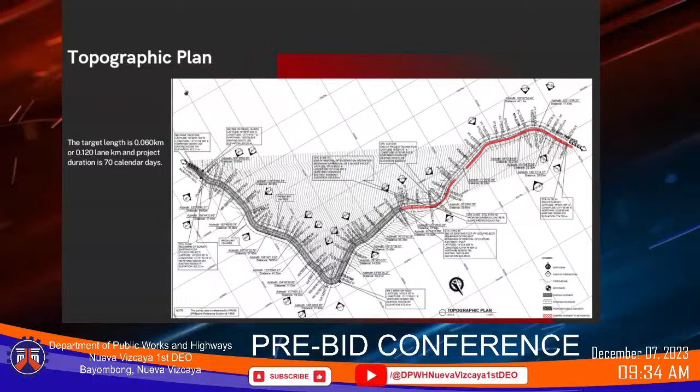So these are the following technical details of the project. The project site is located approximately 2.8 kilometers from Ambaguio Town Hall, and approximately 30 kilometers from Bayombong, Nueva Vizcaya. This is a continuation of the concreting project implemented this year, FY 2023. The yellow alignment shows the FY 2023 project and the red indicates the FY 2024 project. The FY 2024 project has a target length of 0.06 kilometers or 0.12 lane kilometer with a duration of 70 calendar days.

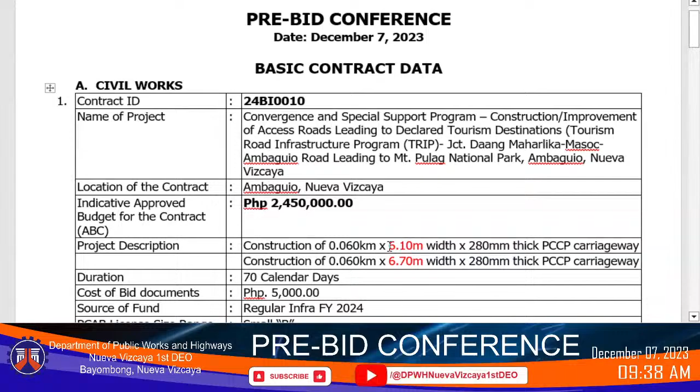If the width will be increased, is there a revision of the quantities? Because the description says 6.10 width, and then we're going to increase it to 6.7. How about the quantities, will this be affected or not? It will not be affected, sir. How not? Because, sir, during the advertisement period, we misstated the width in this description, so the bill of quantities is not affected. So you mean to say that there is a typo error in the encoding of the width of the PCCP, particularly in the project description? Yes, sir. Okay, noted.

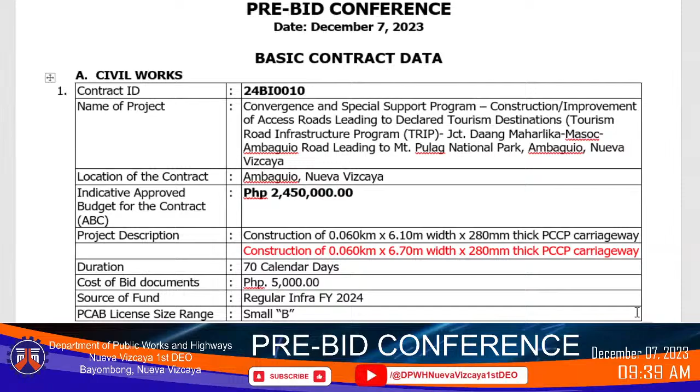No changes in the... wait, but you should first... please take note, how about the provisional member for all types of procurement?

I have no amendments, sir. No amendments? Okay, noted. How about the regular member? Okay, Secretariat, please take note that the only amendment is the increase in the width of the PCCP. And the quantities will not be affected since it is just a typo error in the project description.

Thank you, this is noted, sir. Okay, for the second project, it has contract ID number 24BI11, and this will be discussed by Engineer Angie Argel Reyes.

Good morning, everyone. Allow me to read the basic contract data for this particular project. Contract ID 24BI0011, name of project: Convergence and Special Support Program, construction improvement of access roads leading to declared tourism destinations, Tourism Road Infrastructure Program (TRIP), access road leading to Lower Magat Ecotourism Park, Diadi, Nueva Vizcaya. Location of the contract: Diadi, Nueva Vizcaya. Indicative approved budget for the contract: 2,450,000. Project description: construction of 0.125 kilometer by 6.1 meter width by 280 mm thick PCCP carriageway.

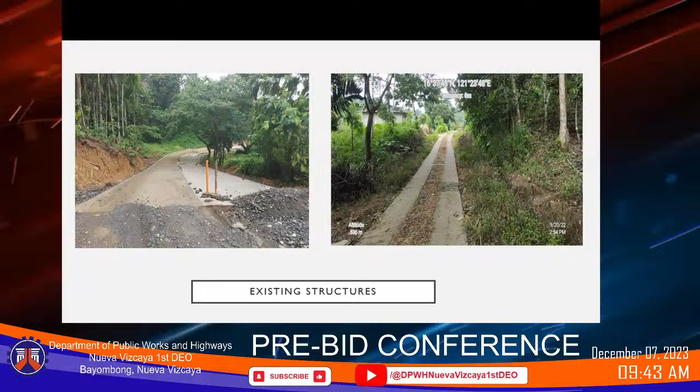So this is the existing pavement which was previously constructed, and this existing tire path is to be removed. The total length of the project is 125 meters with a width of 6.10 meters and a thickness of 280 mm. The proposed project also has a concrete curb and gutter, cast in place, since the terrain of the project is mountainous. From Station 0+760 to Station 0+845, left side, metal guardrails will be provided.

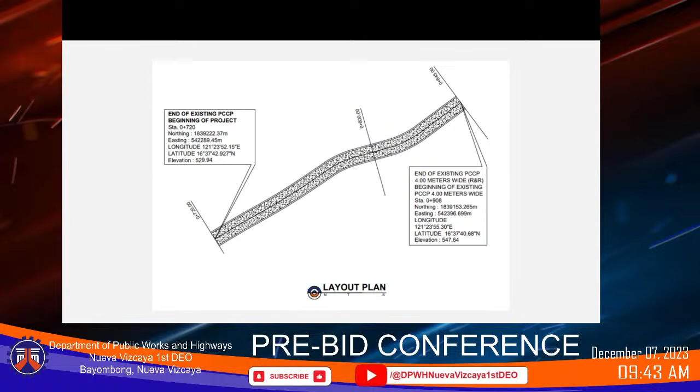The source of aggregate for both Item 311 and Item 200 is at Baretbet Quarry, approximately 28.3 kilometers from the project site. The source of materials, cement and RSB, will be in Solano, approximately 41.8 kilometers from the project site. This project will be completed within 70 calendar days, inclusive of predetermined Sundays and holidays.

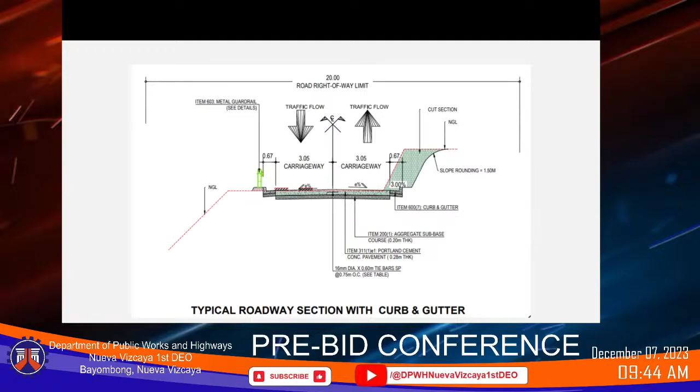Before we go to further discussion of contract ID number 11, may I request Engineer Mirtel Digamo for project number 10? Do we also have curb and gutter there along Mount Pulag Road? Yes, sir, we have. What type of curb and gutter? Cast in place, sir. Cast in place? Yes po, for the reason that the road is mountainous, winding, and in a mountainous area wherein precast is not advisable. Okay? Yes.

Okay, may I request the Secretariat if there is any comments, recommendations, or query about project number 11? No comments? Okay. Then may I request the members of the BAC if there is any amendment? I would like to start from Engineer Chairman Buenavista. Mr. Presiding Officer, I have no amendments.

How about the provisional member for all types of procurement? I have no amendment, sir. Noted. How about the regular member of the BAC, Madam Veronica Leodovico? I have no amendment, Mr. Vice Chair. No amendments. Since there is no amendment for this particular project, the advertised bidding documents from PhilGEPS and the DPWH website will now be sustained as is. Thank you.

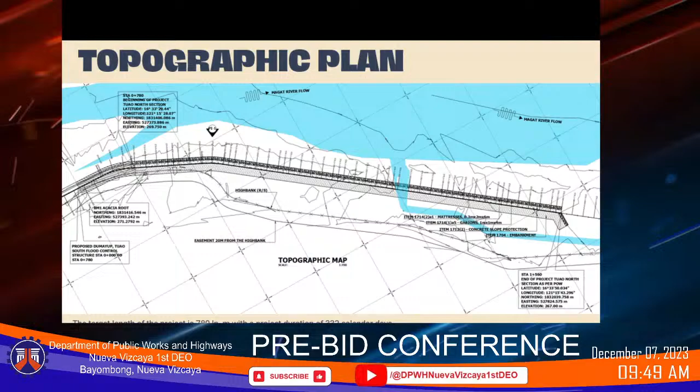The structure is composed of concrete slope protection with a thickness of 0.20 meter and a total height of 5 meters. Reinforcing steel bars for the concrete slope protection are 12 millimeter diameter, spaced at 400 millimeter on center both ways. Next slide, po.

Next slide. The concrete slope protection was provided with a parapet with a dimension of 0.25 meters by 0.50 meters, reinforced with 12 millimeter diameter vertical bars spaced at 400 millimeter, and two 12 millimeter diameter horizontal bars spaced at 400 millimeter. The concrete slope protection is also provided with a walkway with a width of 1 meter. Next slide, po. Go back to the slide, you're going too fast, you didn't even explain the previous slide. Go back there. There.

The structure is composed of concrete slope protection with a thickness of 0.20 meter and a total height of 5 meters. The reinforcing steel bars for the concrete slope protection are 12 millimeter diameter, spaced at 400 millimeter on center both ways.

From your typical section, you have gabions and mattresses. Mattresses and gabions will be placed in front of the sheet piles from station 0+780 to station 1+560.

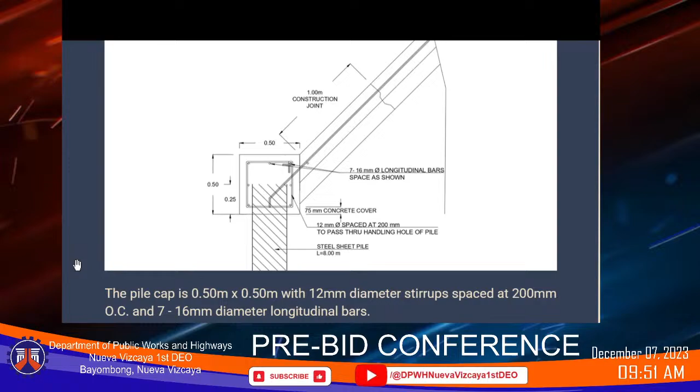Okay, please show the typical section of the sheet piles. The one near the sheet pile. The one up top. The same, yes, that one, on the right.

The sheet pile is 8 meter length, Z-type steel sheet piles, with a nominal width of 770 millimeter, a nominal height of 343.50 millimeter, flange thickness of 8.6 millimeter, and web thickness of 8.5 millimeters.

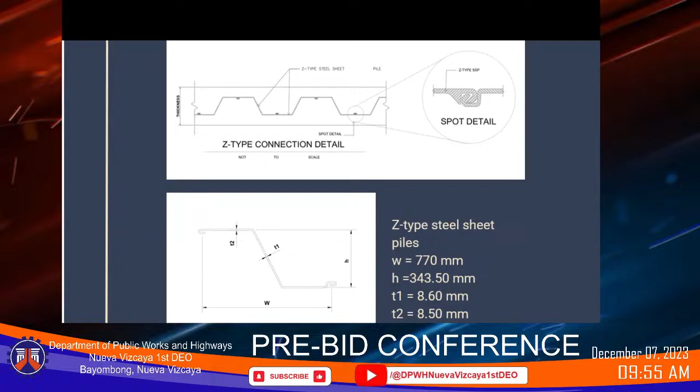For the cut-off walls, they are placed every 50 meters within the length of the concrete slope protection, with 16 millimeter diameter vertical bars spaced at 400 millimeter on center and 12 millimeter diameter horizontal bars spaced at 400 millimeter on center. The footing of the cut-off wall is 0.30 meters thick with 16 millimeter diameter top and bottom bars spaced at 400 millimeter both ways.

The aggregates for the project will be transported from the Baretbet section of Magat River in Bagabag, Nueva Vizcaya, situated approximately 6 kilometers away from the project site. That is all.

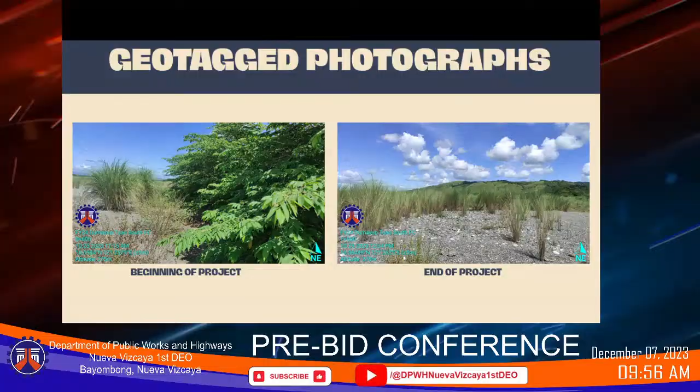Okay, thank you, Engineer Jeremy Soriano. From the Secretariat, do we have any query or comments from our prospective bidders? There is none. So I would like again to ask the members of the BAC, particularly Engineer Jermin Buenavista, the provisional member from the Planning and Design section.

Mr. Presiding Officer, I have no amendments regarding this project. Noted. How about Architect IB Olivar Salazar? I have no amendments, sir.

Noted. How about the regular member, Madam Veronica Jodevico? No amendment, Mr. Vice Chair. Noted. Secretariat, please take note that since we have no amendments for this particular project, we are going to sustain the advertised bidding documents from the PhilGEPS and DPWH website. Noted, sir.

So we go now to contract ID number 13, and this will be presented to us by Engineer Philip Pagarigan. Philip, please take it away. Thank you, po. I will present the basic contract data for contract ID.

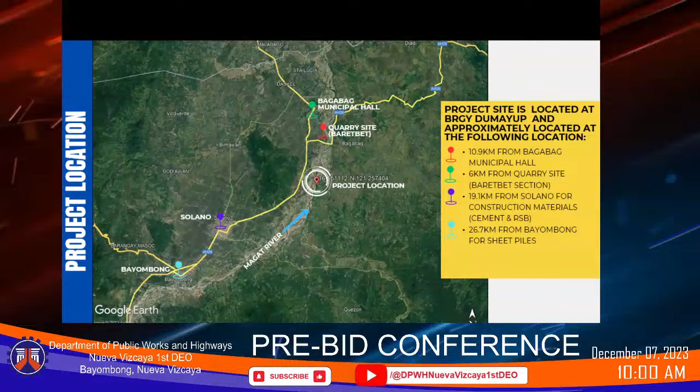For the next slide, our detailed cross-section. The structure will be composed of concrete slope protection, 200 mm thick, with a height of 5 meters from the pile cap. Reinforcement is 12 mm bars spaced at 400 both ways. It has gabion of 1 by 1 by 4, and mattresses 0.3 thick by 2 meters by 6. We start from station 00 to station 780.

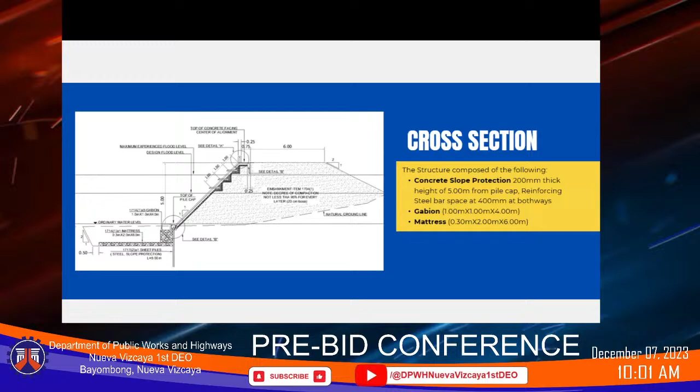Next slide, this is the detail for the pile cap, 500 by 500 with 12 mm diameter stirrups spaced at 200 on center and 7 pieces of 16 mm diameter longitudinal bars.

From the top, this is the detail of the parapet. We will provide a parapet from station 00 to 780 with a height of 0.5 meters and a thickness of 0.25 meters.

Excuse me, regarding the depth anchor of the cut-off wall. The hook is for the cut-off wall, 1 meter is the depth. The thickness is 0.2 for ours.

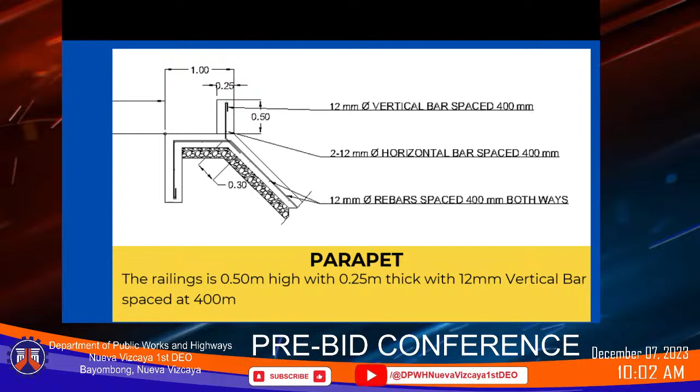The detail of our sheet pile is for Z-type steel sheet piles. Width is 770 millimeters with a height, and the H is 343.50. Thickness is 8.60 millimeters, and the other thickness is 8.5 millimeters. Same as in our previous project, sir. The thickness of the sheet pile is 8.6, and then 8.5 millimeters, yes, same as the previous project.

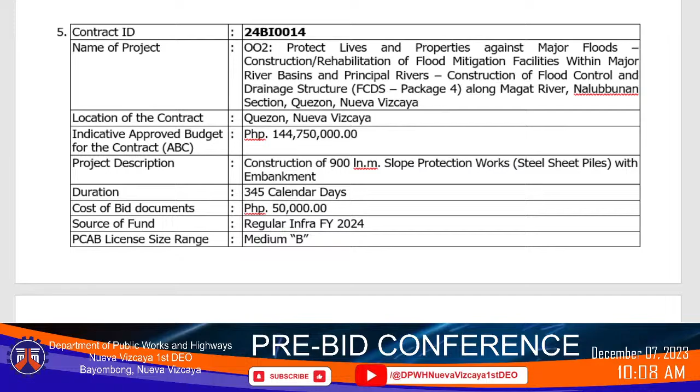The source of fund is Regular Infra for the year 2024. The PCAB license size range is Medium B. PowerPoint presentation, please.

For the 24BI0014, it is located at Nalubbunan. It is just downstream of Madjangat Bridge, continuation of the existing rubble concrete.

Next slide, please. This is the layout plan of this proposed project. Next slide, please.

For this particular project, sir, for the steel sheet pile, the length is 9 meters with a width of 0.77 meters and 0.3435 meters, with a pile cap of 0.5 by 0.5 meters, and the thickness of the steel sheet piles is 8 to 9 mm thick. Hot rolled Z-type sheet pile.

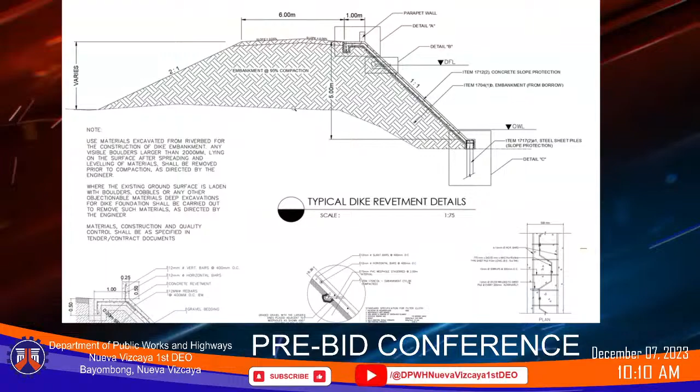Paki-con mo nga yung parapet, yung nasa baba. Paki-enlarge mo nga, Donna. And then paki-discuss, Joseph, about the walkway and the cut-off wall.

For this particular project, the walkway has a total width of 1 meter with a parapet thickness of 0.25 and a height of 0.5 meters. Then at the hook, the cut-off wall anchor has a depth of only 0.5 meters and a thickness of 0.3. That's also the thickness of the concrete slope protection works, which is 0.3.

Do we have any comments or query from our prospective bidders, Secretariat? There is none. Do you have any amendments for this particular project, Engineer Jermin Buenavista? I have no amendments, Mr. Chair.

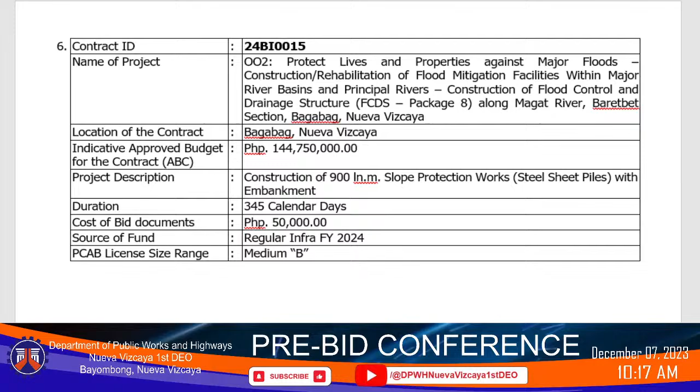Next slide, please. The location of the project is the continuation of the previous project that was pre-bid last time. It is located downstream from San Lorenzo Bridge, facing the left side.

Next slide, please. This is the layout plan of the proposed project. This is the typical section of the proposed project. The steel sheet pile has a height or length of 9 meters, with a 0.5 by 0.5 dimension pile cap. It has a height of 5 meters with a slope of 1:1. The top part of the slope protection has a width of 1 meter. The parapet has a thickness of 0.25 and a height of 0.5. The embankment is 7 meters wide, and the slope at the back is 1:2.

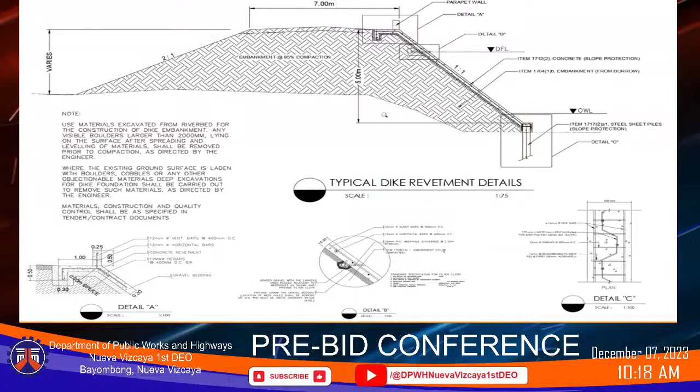I think that's all, sir, for this contract ID number 24BI0015. Thank you, Engineer Joseph Sanchez Adukul.

Do we have any query comments from our prospective bidders, Madam Donna? There is none? Okay.

Do we have any amendments from our bidding documents? Can we start from Architect IB Olivar Salazar, the provisional member for all types of procurement? I have no amendments, sir. How about Engineer Jermin Buenavista, the provisional member, planning and design end user? Do you have any amendments for that particular project? I have no amendments, sir. How about our regular member, Madam Veronica Lodovico? I have no amendments, Mr. Vice Chair. Secretariat, please take note that there will be no amendments for this particular project.

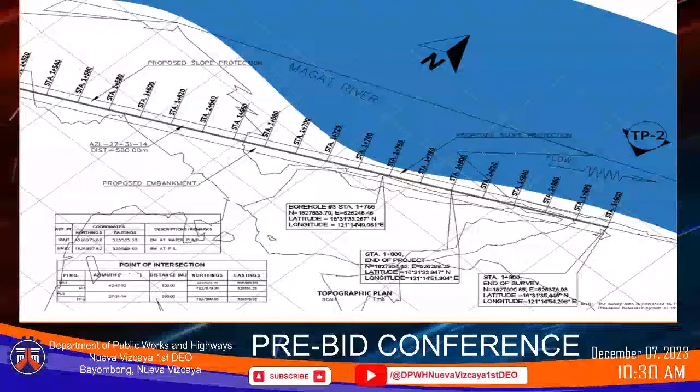For the detail of this proposed project, the height or length of the steel sheet piles for this project, sir, is 8 meters. Then at the top of the steel sheet pile, it has a pile cap of 500mm by 500mm, with a slope protection of a height of 5 meters with a slope of 1:1. Then at the top part of the slope protection that would serve as a walkway, it has a total width of 1 meter with a parapet of 0.25 width and height of 0.5. Then for the embankment, it has a 6 meters width, and at the back it has a slope of 1:2. I think that's all for this particular project.

Okay, thank you Engineer Adukol. From the Secretariat, may we know if there are any comments from the YouTube Live? If there are none, may we also know if there are amendments from our fellow BAC members, from the provisional member from the Planning and Design section, Engineer Buenavista.

The slide shows a close satellite view of the project. If you are facing downstream, it would be 250 meters away from Lamut Bridge. As the legend shows, the proposed alignment is labeled by a red line, and the existing revetments are labeled by a yellow line.

Next page, please. The slide shows the layout plan of the project, showing the total length of 720 linear meters constructed between or at the gap of two existing revetments.

Next slide, please. The left picture of the slide shows us the existing concrete revetment at upstream, and at the right side is the picture of the existing concrete revetment at downstream, or at station 650 to station 720, which is at the end side of our project.

Do you have a picture presentation for that particular section, Marson? Yes sir, meron po akong dinesign. No, yung topo plan sana, para makita ng ating viewers. Yes sir. Next slide po, papakita. Yan po sir, this is the topographic plan. Hindi, kung sa picture mo sana sa downstream at Ifugao side, mayroon silang slope protection works doon eh. Yun na lang po kasi yung provided na picture sir eh. Okay, yes sir.

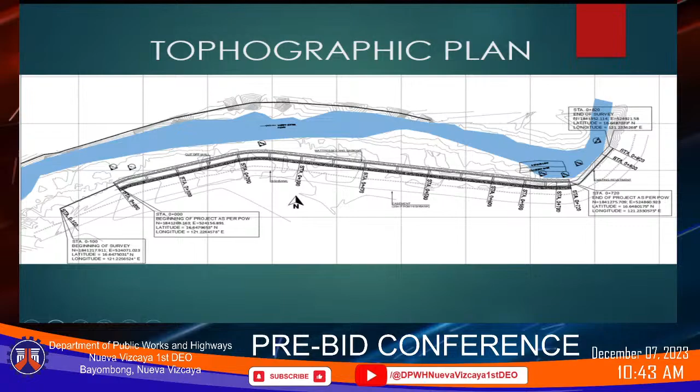Next slide. The slide shows us the typical section of the concrete slope at station 0 to station 650. The reinforcement of the pile is 60 by 60 and has a stirrup of 12 mm, and the main bar would be 16 mm. It would be discussed on the next page because we have a more typical, or larger, section there.

And the steel sheet pile to be used is a Z type and has a length of 7 meters. The total height of the concrete slope protection is 6 meters with a berm at 3 meters, and the slope of 1 by 1, or 1 vertical and 1 horizontal, with a concrete parapet which has a dimension of 0.25 by 0.50 and an embankment of 5 meters. Next slide, please.

The slide shows a typical section of the cut-off wall. The cut-off wall reinforcement from station 0 to station 650 has horizontal bars of 16 mm spaced at 400, and also horizontal 12 mm diameter bars spaced at 400. The thickness is 0.30.

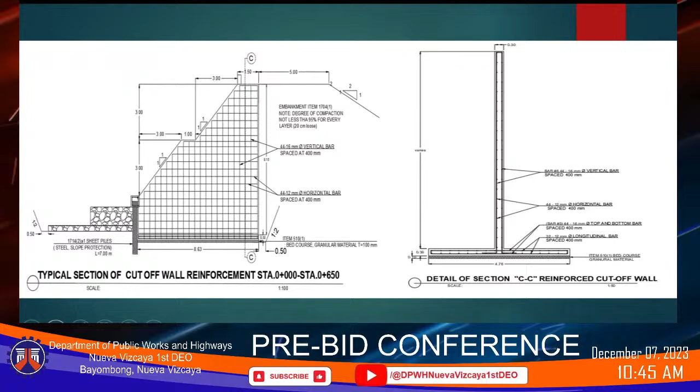Next slide, please. This section shows the part at the end, at station 650 to 720, because it has an existing revetment. We came up with the design to tie in the slope protection in order to maximize our design. Next slide, please.

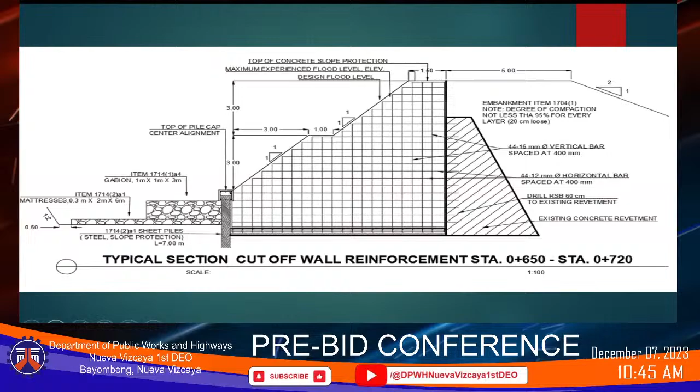And this is the typical section for the cut-off wall, connecting to the existing structure. Next slide.

That's all, Marston? Yes, sir. That's all. So, someone asked me a query - did you explain the separator or cut-off wall? Cut-off wall, sir, is located every 50 meters of the project. Yes, sir. That is not exactly a cut-off wall, but if you think about it, it is a concrete retaining wall, right, Jermaine? Yes, sir. So you're going to construct the retaining wall prior to the construction of the slope protection works, right? Yes, sir. Because that needs to be done before you do the embankment. Yes, sir, because that will become the pattern, the guide for the slope of the slope protection works. Yes, sir. Okay.

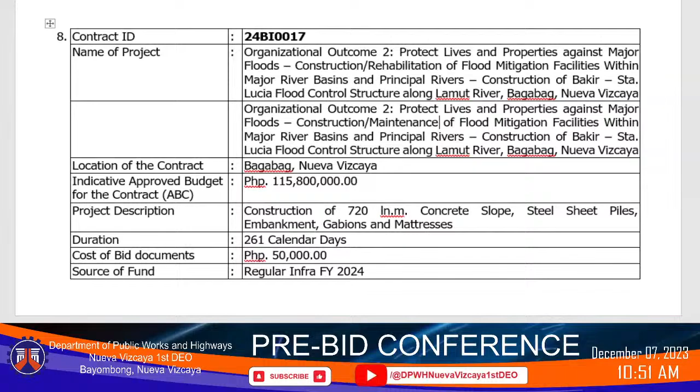And then another amendment, sir, is the calendar days from 261 calendar days to 328 calendar days, sir. Okay, please take note, Secretariat.

Any more amendments for contract ID number 24BI0017? No more, sir. Okay, noted. How about Architect Ivy Olivar Salazar?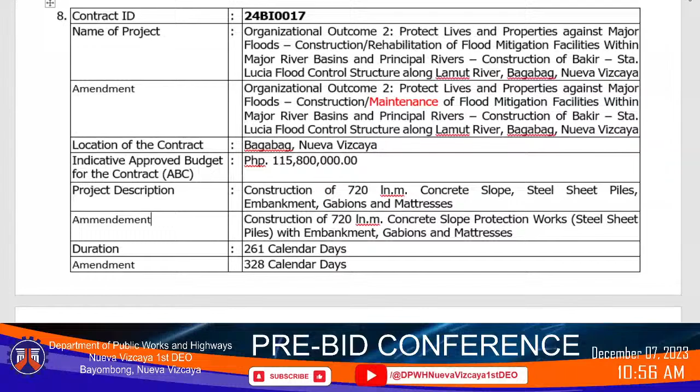Instead of construction/rehabilitation, it will be construction/maintenance of flood mitigation facilities. And for the project duration, from 261 calendar days to 328 calendar days. Please take note, on the preparation of the BAC resolution for the same category, there will be the same project description, which is concrete slope protection works, open and close parentheses, steel sheet piles with embankment. Please take note, okay? So we go to the last project to be discussed on the basic contract data.

And it has contract ID number 24BI0018. And this will be discussed to us by Engineer Myrtel Briosos Grospe Degamo. Myrtel, please take it away.

Thank you, sir. So for the last contract for today's procurement activity, contract ID 24BI0018. Name of project is Organizational Outcome 2, Protect Lives and Properties Against Major Floods, Construction/Rehabilitation of Flood Mitigation Facilities within Major River Basins and Principal Rivers, Construction of Santa Lucia Bakir River Control Structure along Magat River, Bagabag, Nueva Vizcaya. Location of the project is Bagabag, Nueva Vizcaya. Indicative approved budget for the contract is 115,800,000 pesos. Project description is construction of 720 linear meter concrete slope, steel sheet piles, embankment, gabions, and mattresses. Duration is 261 calendar days. Cost of bid documents is 50,000 pesos. Source of fund is regular infra FY 2024, and PCAB license size range is Medium B.

So for the technical details of the project, the site is located at Barangay Santa Lucia, Bagabag, Nueva Vizcaya. It is approximately 5.5 kilometers from Bagabag Municipal Hall and near the intersection of Lamut River and Magat River.

The slide shows the yellow line is the proposed Santa Lucia flood control and the red line is the project Santa Lucia Bakir flood control.

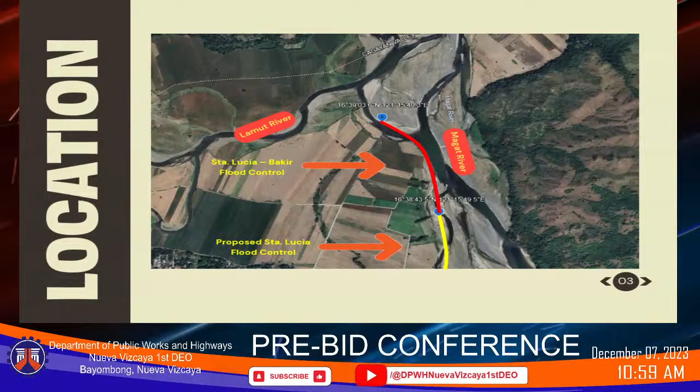Next slide, please. So the target length of the project is 720 linear meters with a project duration of 328 calendar days.

The structure is composed of concrete slope protection with a thickness of 0.2 meters and a total height of 6 meters, with a 1 meter wide berm located at 3 meters from top of pile cap. The top of the slope protection is 1.5 meters with parapet with a dimension of 0.25 meters by 0.5 meters.

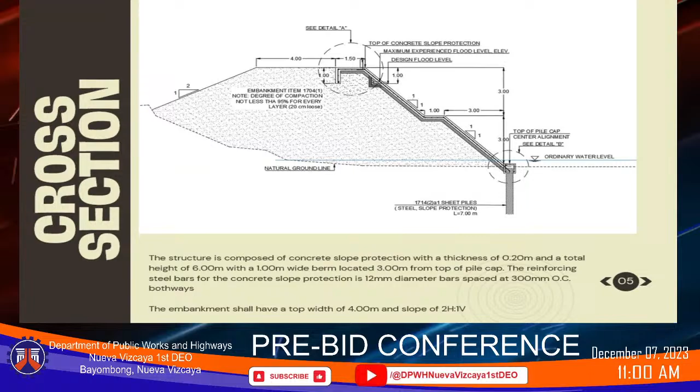The reinforcing steel bars for the concrete slope protection is 12 mm diameter bars spaced at 300 mm both ways. The embankment shall have a top width of 4 meters and a slope of 2 horizontal and 1 vertical.

So 2 by 6 by 0.3 meter mattresses and 1 by 1 by 4 meter gabions will be placed in front of the sheet piles from station 900 to station 1 plus 320.

Next slide. The pile cap is 0.6 meters by 0.6 meters with 12 mm diameter stirrups spaced at 200 mm, and 7 pieces of 16 mm diameter longitudinal bars. 12 mm diameter bars are added as shown for additional reinforcement.

7 meter Z-type steel sheet piles will be used with a nominal width of 770 mm, nominal height of 343.5 mm, flange thickness of 8.6 mm, and web thickness of 8.5 mm.

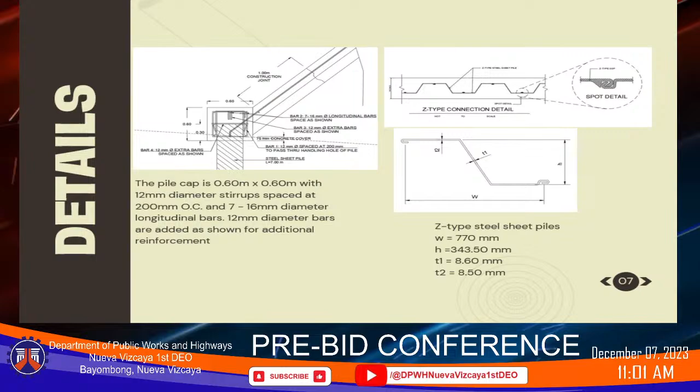Next slide po. So from design guidelines, criteria, and standards for rigid revetments, the length of one segment of revetment along the longitudinal direction should not be more than 50 meters.

Therefore, cut-off walls or retaining walls are placed every 50 meters, with 16 mm diameter vertical bars spaced at 400 mm and 12 mm diameter horizontal bars spaced at 400 mm.

The footing of the cut-off or retaining wall is 0.3 meter thick with 16 mm diameter top and bottom bars spaced at 400 mm both ways.

So the aggregates for the project will be transported from the Santa Lucia Quarry in Bagabag, Nueva Vizcaya, situated approximately 4 kilometers away from the project site.

So that's all, sir, for contract ID number 24BI0018. Thank you, sir.

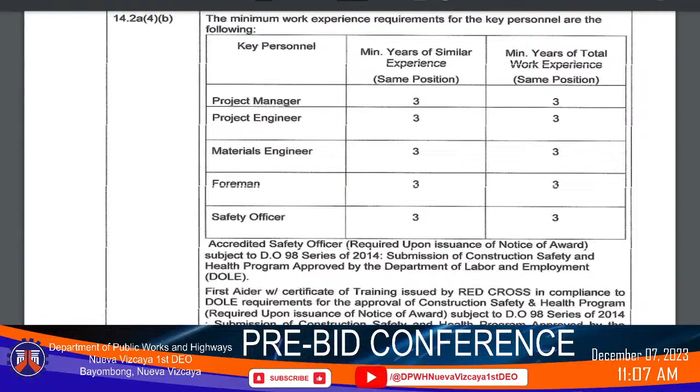For project manager, project engineer, materials engineer, foreman, and safety officer, the minimum years of similar experience with same position is 3 years, and the minimum years of total work experience with same position is 3 years.

The accredited safety officer is required upon issuance of notice of award, subject to DO 98 series of 2014, submission of a construction safety and health program approved by the Department of Labor and Employment. For the first aider, a certificate of training issued by Red Cross is required in compliance with DOLE requirements for the approval of the construction safety and health program, required upon issuance of notice of award subject to DO 98 series of 2014.

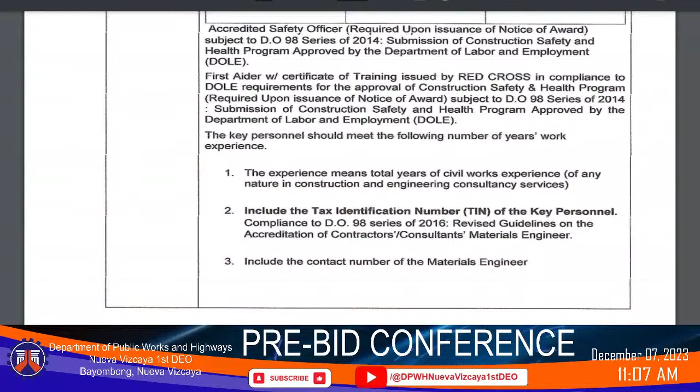For ITB clause 14.2A4, the minimum major equipment requirements are the following: 1 low bed, 1 backhoe with breaker, 1 payloader, 2 dump trucks, 1 bulldozer, 1 backhoe, 1 motorized road grader, 1 vibratory roller, 1 water truck pump, 4 transit mixers, 2 concrete vibrators, 1 concrete batch plant, 1 concrete screeder, 1 concrete saw, 1 bar cutter of 25mm and 1 bar cutter of 32mm, 1 joint sealer, 1 bagger mixer, 1 backhoe wheel mounted, 1 concrete paver, and 1 cargo service truck.

For the laboratory equipment, please refer to DO 11 series of 2017 for the minimum materials testing equipment, and DO 127 series of 2018 for the strict application of RA 9184, the conduct of post-qualification of bidders with delayed ongoing contracts with the DPWH.

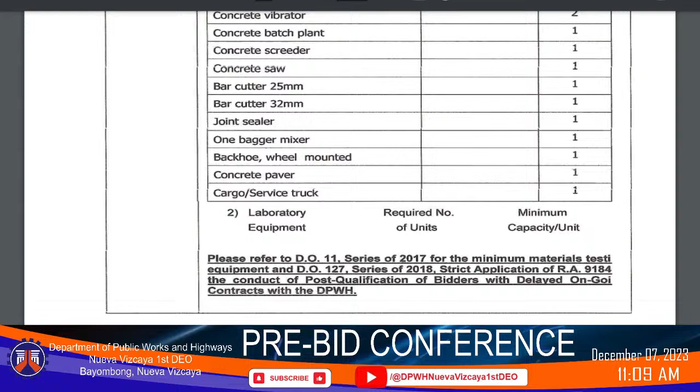For contract ID 24BI0011, for ITB clause 14.2A4B, the minimum work experience requirements for the key personnel are the following: project manager, project engineer, materials engineer, foreman, and safety officer. The minimum years of similar experience with same position is 3 years, and the minimum years of total work experience with same position is 3 years.

For ITB clause 14.2A4, the minimum major equipment requirements are the following: 2 payloaders, 3 dump trucks, 1 water truck pump, 1 cargo service truck, 4 transit mixers, 5 low bed, 1 backhoe with pavement breaker, 1 vibratory roller, 1 bulldozer, 1 concrete paver, and 1 motorized road grader. For the laboratory equipment, please refer to DO 11 series of 2017 for the minimum materials testing equipment.

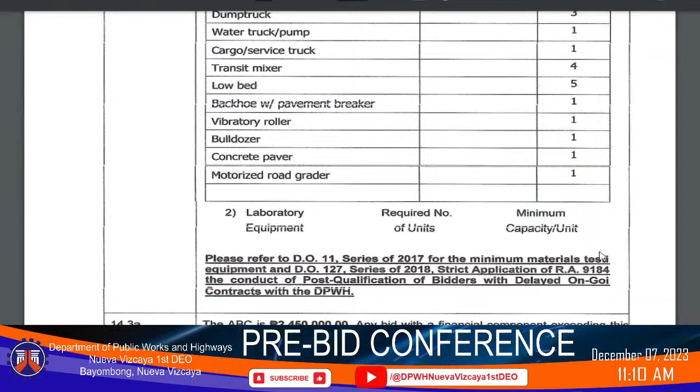For contract ID 24BI0012, for ITB clause 14.2A4B, the minimum work experience requirements for the key personnel are the following: project manager, project engineer, foreman, safety officer. The minimum years of similar experience with same position is 3 years, and the minimum years of total work experience with same position is 3 years.

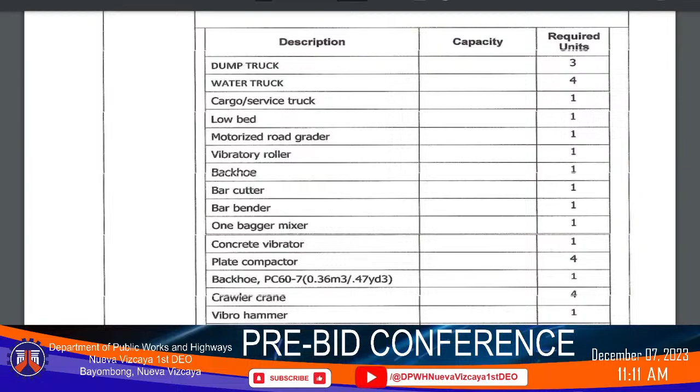For ITB clause 14.2A4, the minimum major equipment requirements are the following: 3 dump trucks, 4 water trucks, 1 cargo service truck, 1 low bed, 1 motorized road grader, 1 vibratory roller, 1 backhoe, 1 bar cutter, 1 bar bender, 1 bagger mixer, 1 concrete vibrator, 4 plate compactors, 1 backhoe, 4 crawler crane, 1 vibro hammer, 1 welding machine, 1 cutting outfit, and 4 water pumps. For the laboratory equipment, please refer to DO 11 series of 2017 for the minimum materials testing equipment.

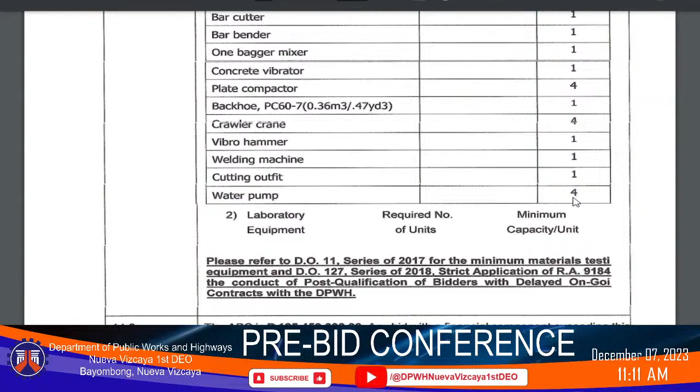For contract ID 24BI0013, for ITB clause 14.2A4B, the minimum work experience requirements for the key personnel are the following: project manager, project engineer, materials engineer, foreman, and safety officer. For the project manager, project engineer, materials engineer, and foreman, the minimum years of similar experience with same position is 5 years, and the minimum years of total work experience with same position is 5 years. For the safety officer, the minimum years of similar experience with same position is 3 years, and the minimum years of total work experience with same position is 3 years.

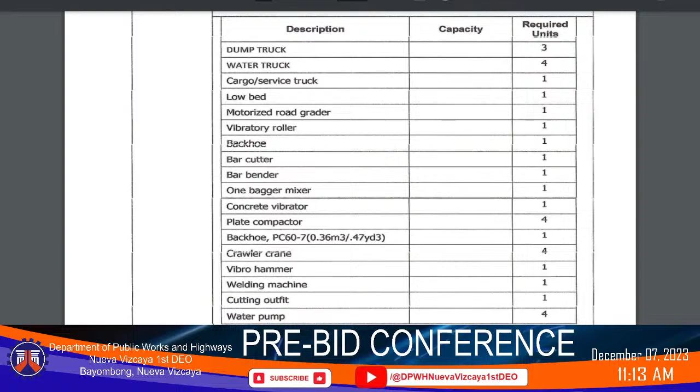For ITB clause 14.2A4, the minimum major equipment requirements are the following: 3 dump trucks, 4 water trucks, 1 cargo service truck, 1 low bed, 1 motorized road grader, 1 vibratory roller, 1 backhoe, 1 bar cutter, 1 bar bender, 1 bagger mixer, 1 concrete vibrator, 4 plate compactors, 1 backhoe, 4 crawler crane, 1 vibro hammer, 1 welding machine, 1 cutting outfit, and 4 water pumps. Please refer to DO 11 series of 2017 for the minimum materials testing equipment.

Contract ID 24BI0014. For ITB clause 14.2A4B, the minimum work experience requirements for the key personnel are the following: for project manager, project engineer, materials engineer, and foreman, the minimum years of similar experience of same position is 5 years, and the minimum years of total work experience with same position is 5 years. For the safety officer, the minimum years of similar experience with same position is 3 years, and the minimum years of total work experience with same position is 3 years.

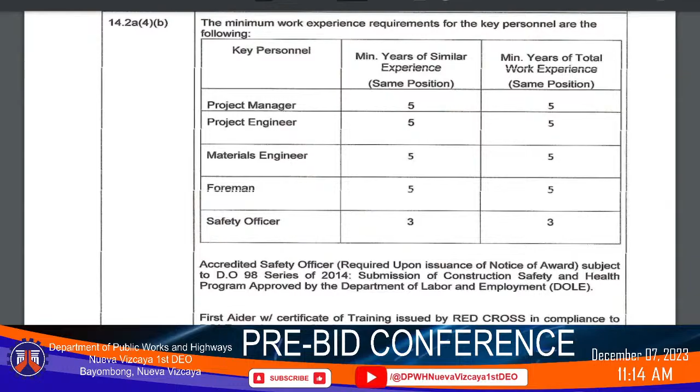For ITB clause 14.2A4, the minimum major equipment requirements are the following: 1 bagger mixer, 1 water truck, 1 backhoe, 4 water pumps, 1 bulldozer, 1 payloader, 2 dump trucks, 1 vibro hammer hydraulic operated, and 1 crawler crane. Please refer to DO 11 series of 2017 for the minimum materials testing equipment.

Contract ID 24BI0015. For ITB clause 14.2A4B, the minimum work experience requirements for the key personnel are the following: for project manager, project engineer, materials engineer, and foreman, the minimum years of similar experience with same position is 5 years, and the minimum years of total work experience with same position is 5 years. For the safety officer, the minimum years of similar experience is 3 years, and the minimum years of total work experience is 3 years.

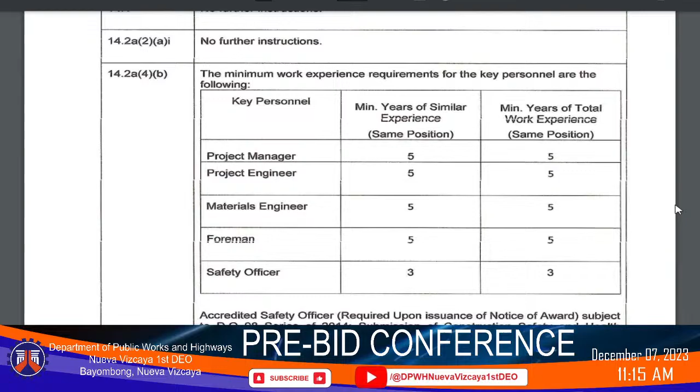For ITB Clause 14.2A4, the minimum major equipment requirements are the following: 4 one bagger mixers, 1 water truck, 1 backhoe, 4 water pumps, 1 bulldozer, 1 payloader, 2 dump trucks, 1 vibro hammer hydraulic operated, and 1 crawler crane. Please refer to DO 11 series of 2017 for the minimum materials testing equipment.

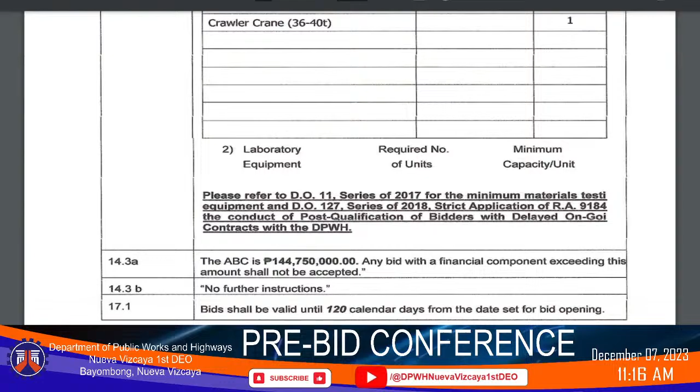Contract ID 24BI0060.

For ITB Clause 14.2A4B, the minimum work experience requirements for the key personnel are the following. Project manager, project engineer, materials engineer, and foreman: the minimum years of similar experience is 5 years, and the minimum years of total work experience with same position is 5 years. For the safety officer, the minimum years of similar experience with same position is 3 years, and the minimum years of total work experience with same position is 3 years.

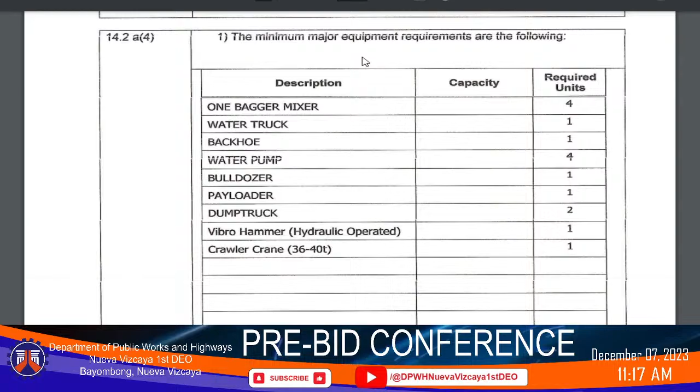For ITB Clause 14.2A4, the minimum major equipment requirements are the following: 4 one bagger mixers, 1 water truck, 1 backhoe, 4 water pumps, 1 bulldozer, 1 payloader, 2 dump trucks, 1 vibro hammer, 1 crawler crane. Please refer to DO 11 series of 2017 for the minimum materials testing equipment.

Contract ID 24BI0017. For ITB Clause 14.2A4B, the minimum work experience requirements for the key personnel are the following.

Project manager, project engineer, materials engineer, and foreman with the minimum years of similar experience with same position is 5 years, and the minimum years of total work experience with same position is 5 years. For the safety officer, the minimum years of similar experience with same position is 3 years, and the minimum years of total work experience with same position is 3 years.

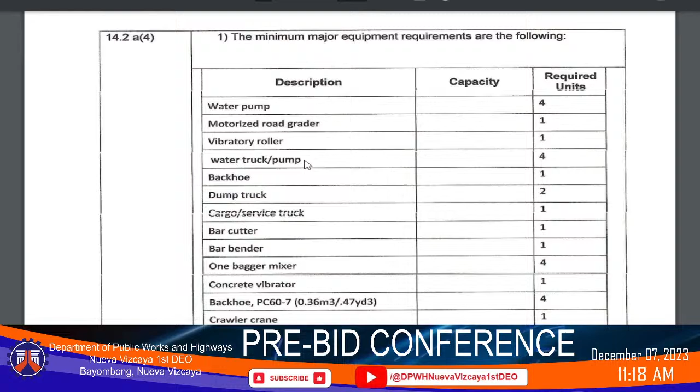For ITB Clause 14.2A4, the minimum major equipment requirements are the following: 4 water pumps, 1 motorized road grader, 1 vibratory roller, 4 water truck pumps, 1 backhoe, 2 dump trucks, 1 cargo service truck, 1 bar cutter, 1 bar bender, 4 bagger mixers, 1 concrete vibrator, 4 backhoes, 1 crawler crane, 1 vibro hammer, 1 welding machine, and 1 cutting outfit. Please refer to DO 11 series of 2017 for the minimum materials testing equipment.

Contract ID 24BI0018.

For ITB Clause 14.2A4B, the minimum work experience requirements for the key personnel are the following. Project manager, project engineer, materials engineer, and foreman: the minimum years of similar experience with same position is 5 years, and the minimum years of total work experience with same position is 5 years. For the safety officer, the minimum years of similar experience with same position is 3 years, and the minimum years of total work experience with same position is 3 years.

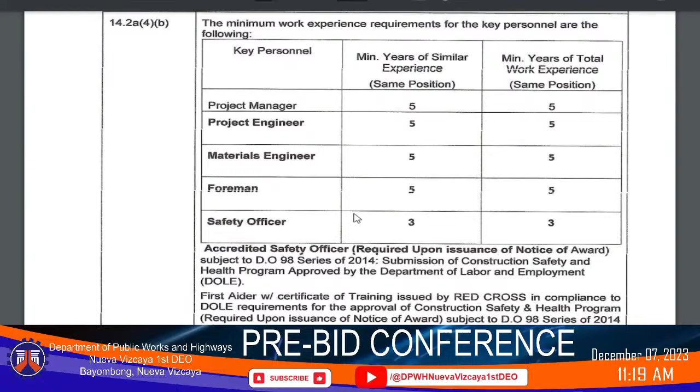For ITB Clause 14.2A4, the minimum major equipment requirements are the following: 4 water pumps, 1 motorized road grader, 1 vibratory roller, 4 water trucks, 1 backhoe, 2 dump trucks, 1 cargo service truck, 1 bar cutter, 1 bar bender, 4 bagger mixers, 1 concrete vibrator, 4 backhoes, 1 crawler crane, 1 vibro hammer, 1 welding machine, and 1 cutting outfit.

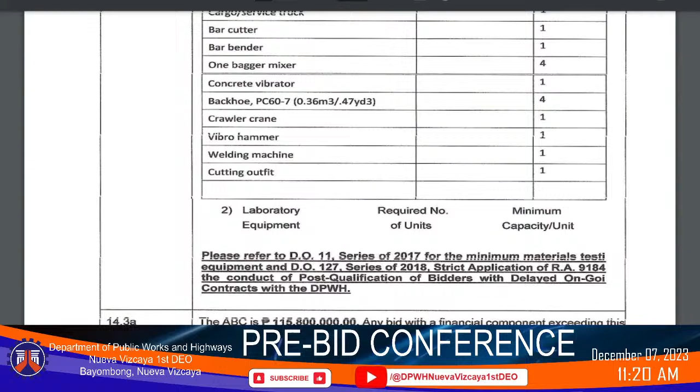Please refer to DO 11 series of 2017 for the minimum materials testing equipment, and DO 127 series of 2018 on strict application of RA 9184 for the conduct of post-qualification of bidders with delayed ongoing contracts with the DPWH. Mr. Vice Chair, that's all for the requirements of bidding documents.

Third agenda will be documents to be submitted by the bidder, including technical and financial proposals. Again, please discuss this particular agenda, Engineer Cecil Kimpalong. Thank you, sir. For agenda number 3, may we listen to the pre-recorded audio?

Technical and financial components. Number 1, technical component envelope. Class A documents. For legal documents, letter A: valid PhilGEPS registration certificate, platinum membership, all pages. Or letter B: registration certificate from Securities and Exchange Commission, Department of Trade and Industry for sole proprietorship, or Cooperative Development Authority for cooperatives, or its equivalent document. And letter C: mayor's or business permit issued by the city or municipality where the principal place of business of the prospective bidder is located, or the equivalent document for exclusive economic zones or areas.

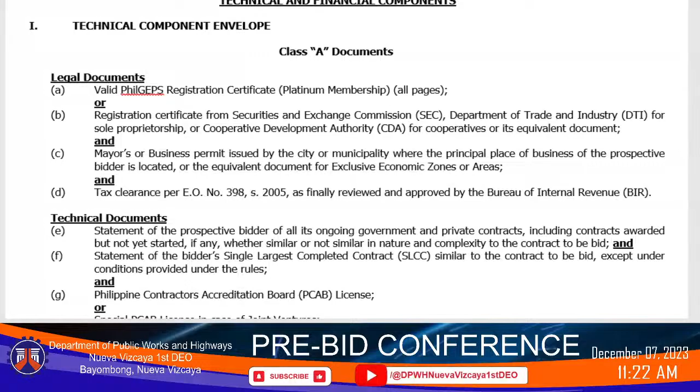And letter D: tax clearance per EO number 398 series of 2005, as finally reviewed and approved by the Bureau of Internal Revenue. For technical documents, letter E: statement of the prospective bidder of all its ongoing government and private contracts, including contracts awarded but not yet started, if any, whether similar or not similar in nature and complexity to the contract to be bid.

And letter F: a statement of the bidder's single largest completed contract, or SLCC, similar to the contract to be bid, except under conditions provided under the rules. And letter G: Philippine Contractors Accreditation Board or PCAB license, or special PCAB license in case of joint ventures, and registration for the type and cost of the contract to be bid.

Letter H: original copy of bid security in the form of surety bond. Submit also the certification issued by the Insurance Commission, or original copy of notarized bid securing declaration.

Letter I, project requirements, which shall include the following: First, organizational chart for the contract to be bid. Second, list of contractors' key personnel, for example project manager, project engineers, materials engineers, safety officer, and foreman, to be assigned to the contract to be bid, with their complete qualification and experience data. Third, list of contractors' major equipment units which are owned, leased, and/or under purchase agreements, supported by proof of ownership or certification of availability of equipment from the equipment lessor, vendor, or for the duration of the project as the case may be. And last, list of contractors' minimum material testing equipment which are owned as per Department Order Number 11, Series of 2017.

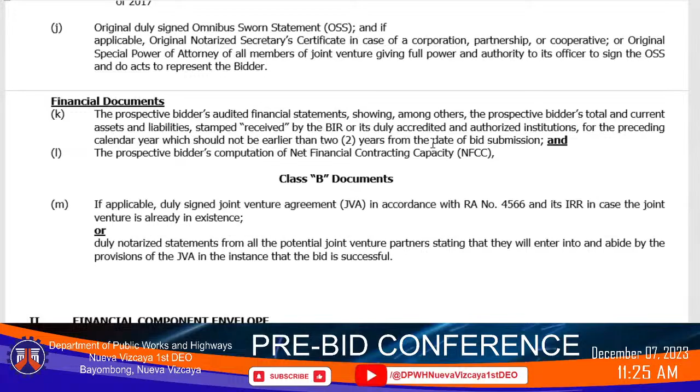Letter M, if applicable, duly signed Joint Venture Agreement (JVA) in accordance with Republic Act Number 4566 and its IRR in case the joint venture is already in existence, or duly notarized statement from all the potential joint venture partners stating that they will enter into and abide by the provisions of the JVA in the instance that the bid is successful.

Number 2, Financial component envelope. Letter N: original of duly signed and accomplished financial bid form and other documentary requirements under Republic Act Number 9184. Letter O: original of duly signed bid prices in the bill of quantities. Letter P: duly accomplished detailed estimate form, including a summary sheet indicating the unit prices of construction materials, labor rates, and equipment rental used in coming up with the bid. And letter Q: cash flow by quarter.

Sir, that's all for the technical and financial documents to be submitted by the bidder.

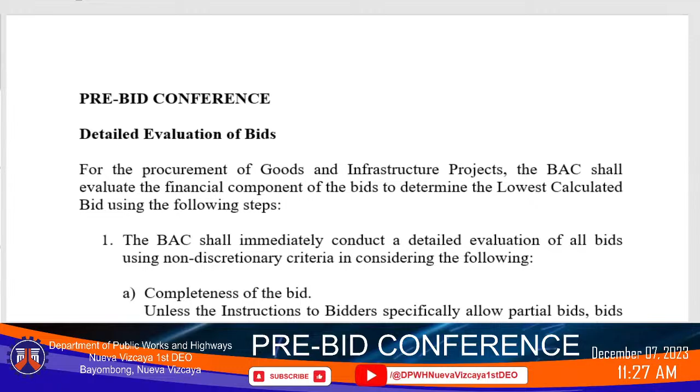The BAC shall immediately conduct a detailed evaluation of all bids using non-discretionary criteria, considering the following: Completeness of the bid. Unless the instructions to bidders specifically allow partial bids, not addressing or providing all of the required items in the bidding documents, including the applicable bill of quantities, shall be considered non-responsive and thus automatically disqualified. In this regard, where a required item is provided but no price is indicated, the same shall be considered non-responsive. But specifying a zero or a dash for the said item would mean that it is being offered for free to the government, except those required by law or regulations to be provided for.

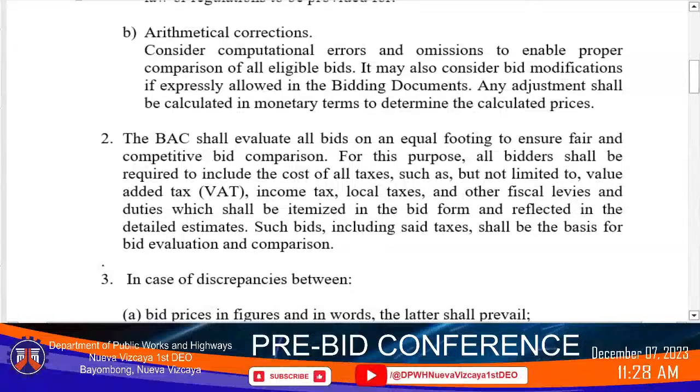Arithmetical corrections: consider computational errors and omissions to enable proper comparison of all eligible bids. It may also consider bid modifications if expressly allowed in the bidding documents. Any adjustment shall be calculated in monetary terms to determine the calculated prices.

The BAC shall evaluate all bids on an equal footing to ensure fair and competitive bid comparison. For this purpose, all bidders shall be required to include the cost of all taxes, such as but not limited to value-added tax, income tax, local taxes, and other fiscal levies and duties, which shall be itemized in the bid form and reflected in the detailed estimates. Such bids, including said taxes, shall be the basis for bid evaluation and comparison.

In case of discrepancies between bid prices in figures and in words, the latter shall prevail. Between total price per item and unit price for the item as extended or multiplied by the quantity of that item, the latter shall prevail. Between stated total price and the actual sum of prices of component items, the latter shall prevail. Between unit cost in the detailed estimate and unit cost in the bill of quantities, the latter shall prevail.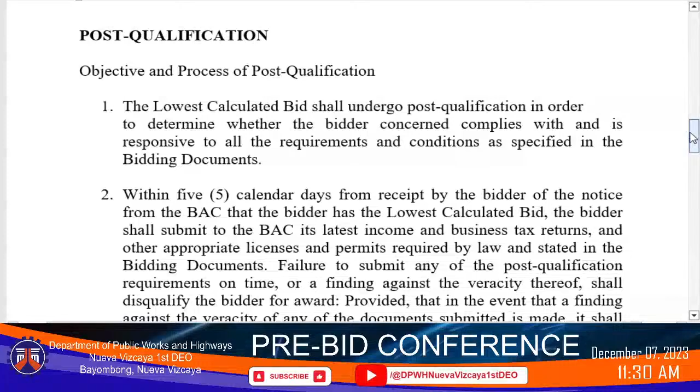Post-qualification. The objective and process of post-qualification: the lowest calculated bid shall undergo post-qualification in order to determine whether the bidder concerned complies with and is responsive to all the requirements and conditions as specified in the bidding document.

Within 5 calendar days from receipt by the bidder of the notice from the BAC that the bidder has the lowest calculated bid, the bidder shall submit to the BAC its latest income and business tax returns and other appropriate licenses and permits required by law and stated in the bidding documents.

Failure to submit any of the post-qualification requirements on time, or a finding against the veracity thereof, shall disqualify the bidder for award, provided that in the event a finding against the veracity of any of the documents submitted is made, it shall cause the forfeiture of the bid security in accordance with Section 69 of this IRR.

The post-qualification shall verify, validate, and ascertain all statements made and documents submitted by the bidder with the lowest calculated bid, using non-discretionary criteria as stated in the bidding documents. These criteria shall consider but shall not be limited to the following.

Legal requirements: to verify, validate, and ascertain licenses, certificates, permits, and agreements submitted by the bidder, and the fact that it is not included in any blacklist as provided in Section 25.3 of this IRR. For this purpose, the GPPB shall maintain a consolidated file of all blacklisted suppliers, contractors, and consultants.

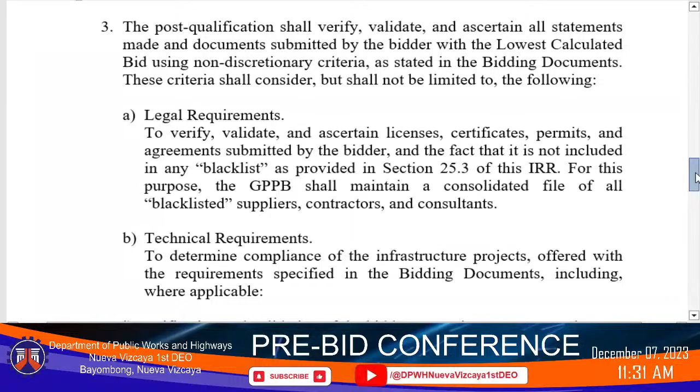Technical requirements: to determine compliance of the infrastructure projects offered with the requirements specified in the bidding documents, including, where applicable, verification and validation of the bidder's stated competence and experience, and the competence and experience of the bidder's key personnel to be assigned to the project for the procurement of infrastructure projects.

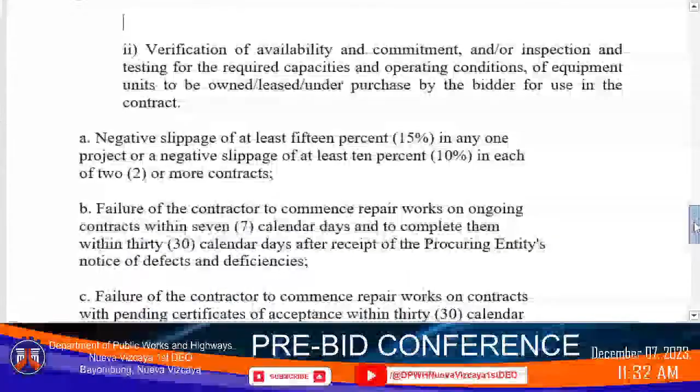Verification of availability and commitment, and/or inspection and testing for the required capacities and operating conditions of equipment units to be owned, leased, under purchase by the bidder for use in the contract.

Negative slippage of at least 15% in any one project, or a negative slippage of at least 10% in each of 2 or more contracts. Failure of the contractor to commence repair works on ongoing contracts within 7 calendar days and to complete them within 30 calendar days after receipt of the procuring entity's notice of defects and deficiencies. Failure of the contractor to commence repair works on contracts with pending certificates of acceptance within 30 calendar days and complete them within 90 days after receipt of the procuring entity's notice of defects and failures, or substandard quality of work as per contract plans and specifications, or unsatisfactory performance of the contractor's obligations as per contract terms and conditions at the time of inspection.

If the BAC verifies any of these deficiencies to be due to the contractor's fault or negligence, the agency shall disqualify the contractor from the award for the procurement of infrastructure projects.

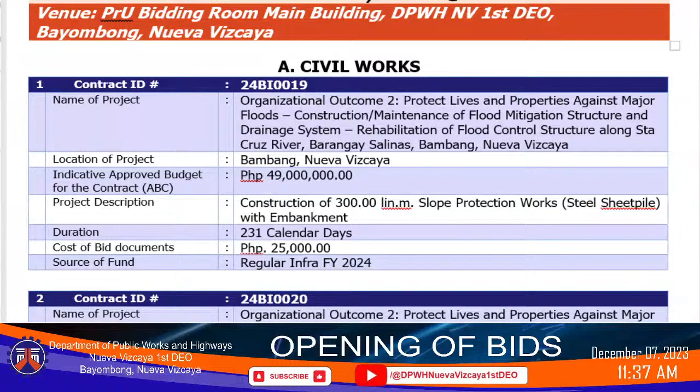This involves 7 civil works projects. Contract ID 24BI0019, organizational outcome 2 protect lives and properties against major floods, construction maintenance of flood mitigation structure and drainage system, rehabilitation of flood control structure along Santa Cruz River, Barangay Salinas, Bambang, Nueva Vizcaya. The location of the project is Bambang, Nueva Vizcaya, with an indicative approved budget for the contract of 49 million pesos.

The project description is construction of 300 linear meters slope protection works, steel sheet pile with embankment. Duration is 231 calendar days, and the cost of bid documents is 25,000 pesos, and the source of fund is regular infra fiscal year 2024.

Second, Contract ID 24BI0020. Organizational outcome to protect lives and properties against major floods, construction rehabilitation of flood mitigation facilities within major river basins and principal rivers, construction of flood control structure along Santa Fe River, Barangay Aliaga, Bambang, Nueva Vizcaya. The location of the project is Bambang, Nueva Vizcaya, with an indicative approved budget for the contract of 96,500,000 pesos. The project description is construction of 600 linear meter slope protection works, steel sheet pile with embankment.

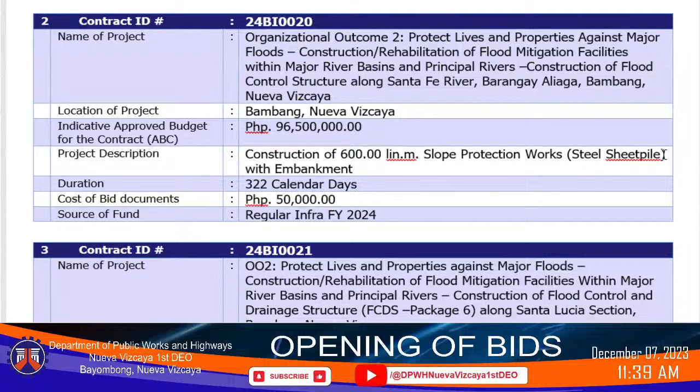Third, Contract ID 24BI0021, OO2 protect lives and properties against major floods, construction rehabilitation of flood mitigation facilities within major river basins and principal rivers, construction of flood control and drainage structure, FCDS Package 6, along Santa Lucia Section, Bambang, Nueva Vizcaya. The indicative approved budget for the contract is 144,750,000 pesos. The project description is construction of

900 linear meter slope protection works, steel sheet pile, with embankment. Duration is 345 calendar days. Cost of bid documents is 50,000 pesos, and the source of fund is regular infra fiscal year 2024.

Fourth, with contract ID of 24BI0022. Organizational outcome to protect lives and properties against major floods, construction maintenance of flood mitigation structure and drainage system, rehabilitation of flood control structure along Magat River, Barangay Santa Rosa, Bayombong, Nueva Vizcaya. The indicative approved budget for the contract is 49 million pesos. The project description is construction of 300 linear meter slope protection works, steel sheet pile with embankment.

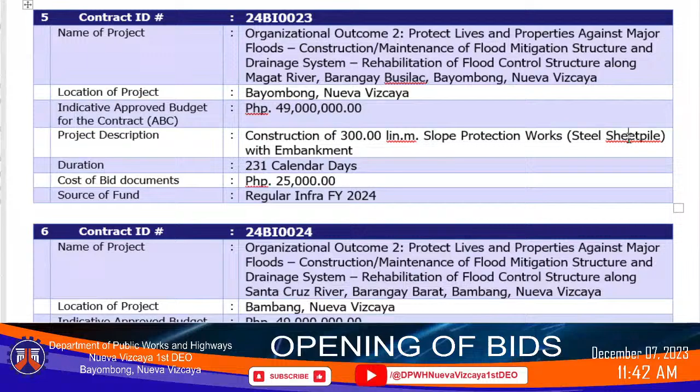The duration of this project is 231 calendar days. The cost of bid documents is 25,000 pesos, and the source of fund is regular infra fiscal year 2024.

The sixth project with contract ID 24BI0024 with project name of organizational outcome 2 protect lives and properties against major floods, construction / maintenance of flood mitigation structure and drainage system, rehabilitation of flood control structure along Santa Cruz River, Barangay Barat, Bambang, Nueva Vizcaya. The indicative approved budget for the contract is 49 million pesos. The project description is construction of 300 linear meter slope protection works, steel sheet pile with embankment.

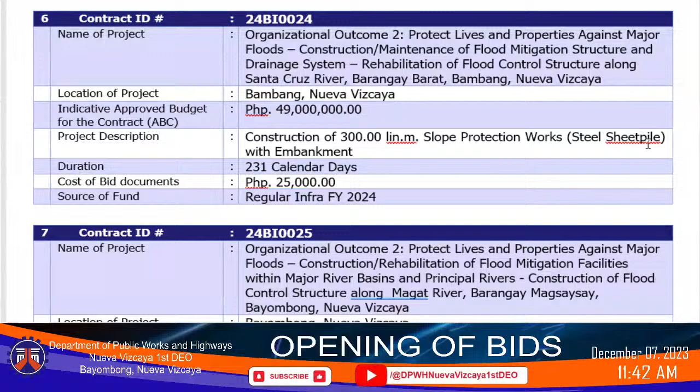The project duration is 231 calendar days. The cost of bidding documents is 25,000 pesos, and the source of fund is regular infra fiscal year 2024.

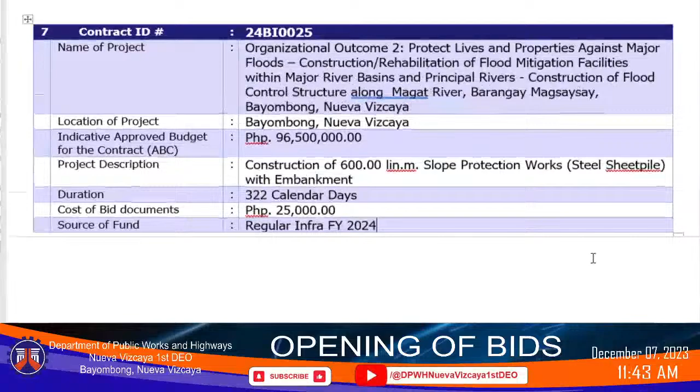And lastly, with contract ID 24BI0025, with project name of organizational outcome 2: protect lives and properties against major floods, construction / rehabilitation of flood mitigation facilities within major river basins and principal rivers, construction of flood control structure along Magat River, Barangay Magsaysay, Bayombong, Nueva Vizcaya. The indicative approved budget for the contract is 96,500,000 pesos. The project description is construction of 600 linear meter slope protection works, steel sheet pile with embankment.

The project duration is 322 calendar days, and the cost of bidding documents is 25,000 pesos. The source of fund is regular infra fiscal year 2024. So that's all.